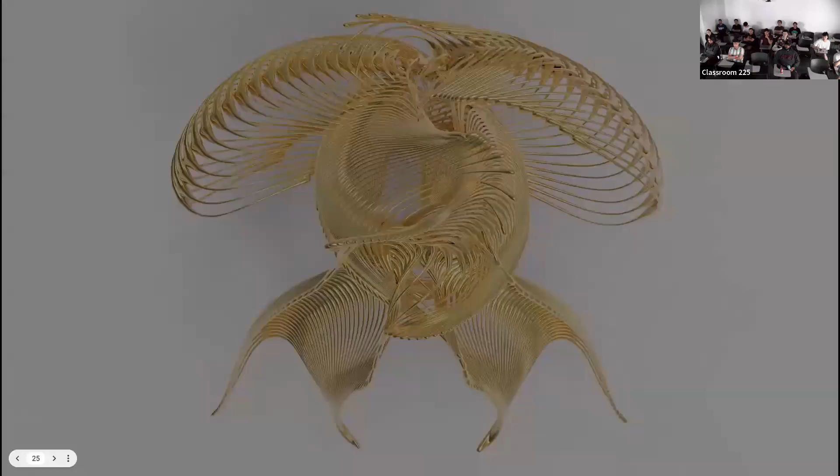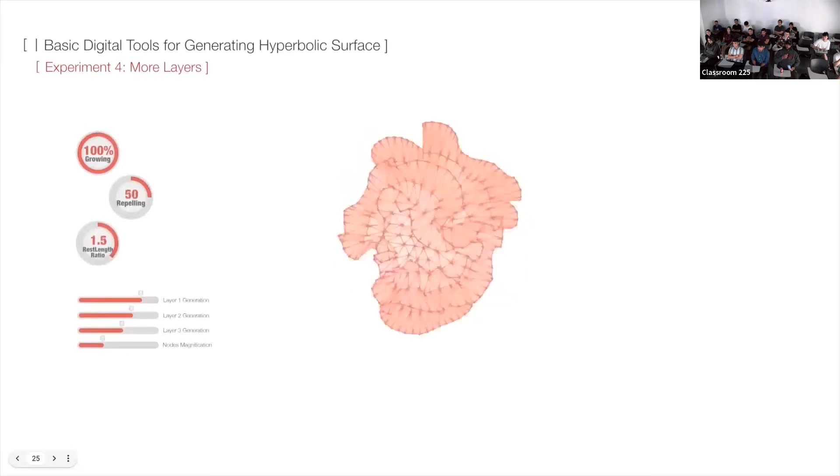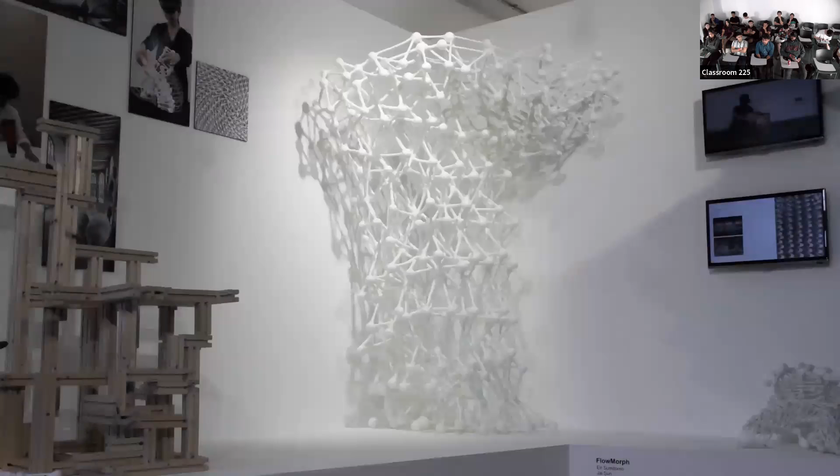Before we had the HoloLens available, most of the digital research was for robotics, modular robotics, for CNC, 3D printing. So I kind of started to look to the ways to use the possibilities of different material systems to be able to execute complex geometry in using meaningful ways.

And the way that adding is for the benefit of the digital process, in order to make the process easy, that's why it's done like that. It's not nice for plastic. Plastic doesn't do it, the plastic is not happy, it added like that. It's not necessary for that material. Of course, plastic is very flexible, that's why you handle it, but not many other materials do that.

And normally, a lot of 3D printing process or robotic printing research are really about simplifying, in order to accommodate digital information, robot only. That's why we have to dumb down so much.

But there are so many other possibilities that are unexplored. We are not interested in robotics, we are really focusing on the material itself first, and instead of having or designing or making something for the sake of using robots or using a certain process.

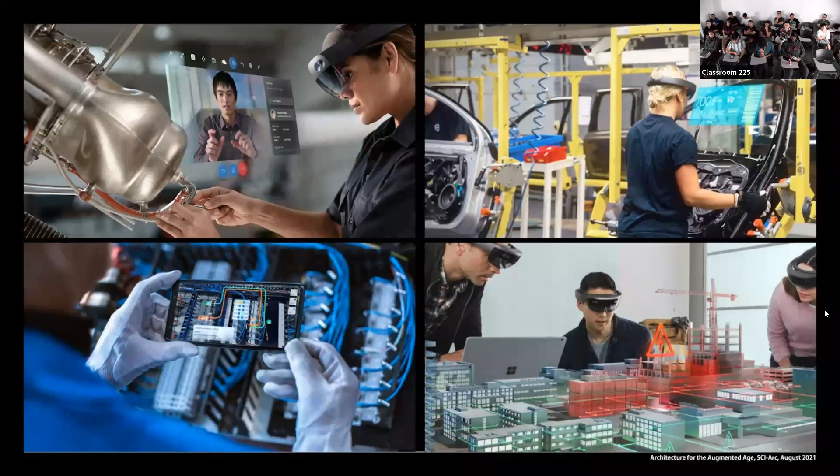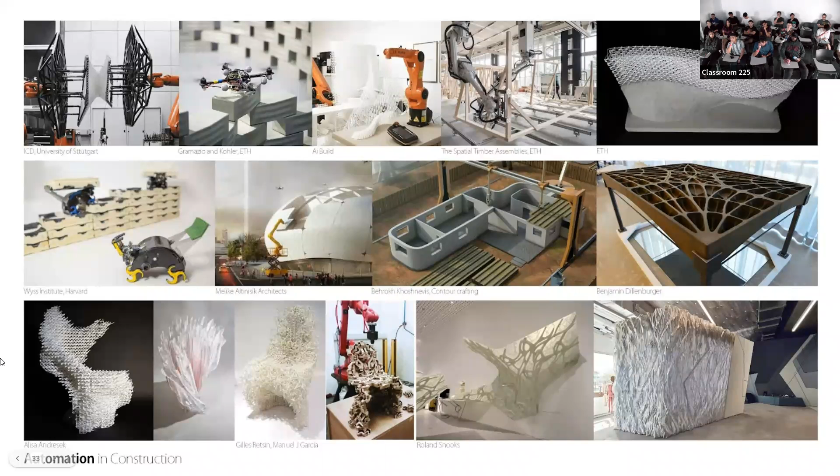So these are applications of research that has been heavily developed over the last 20-something years, really good and very much developed and focused, with a lot of money behind them, but they are based on machining processes.

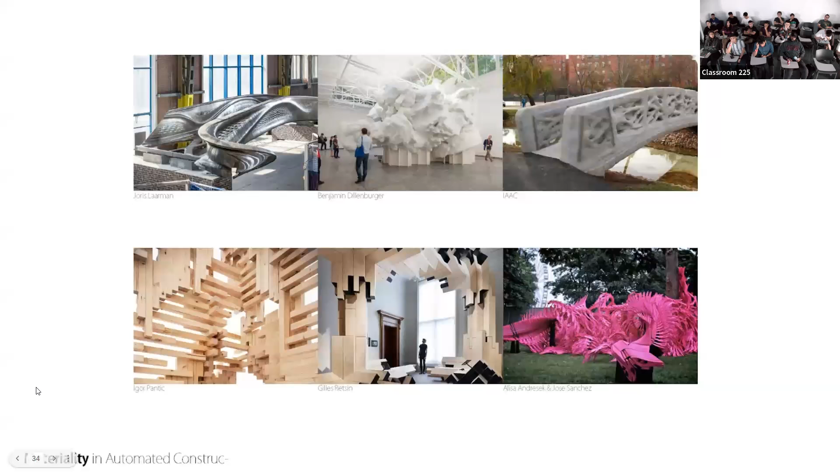They don't really accommodate typical 3D printed stuff. These are typical assembled things, and when you assemble things, you have to reduce this stuff down to a single material.

So that's what I was kind of provoking - what do you do with these kinds of processes? Is it not digital design, or not computational? No, they are - they're just not robotic. There are so many other possibilities we can explore to accommodate and bridge those computational aesthetics that are newly evolving into this world of interesting materials.

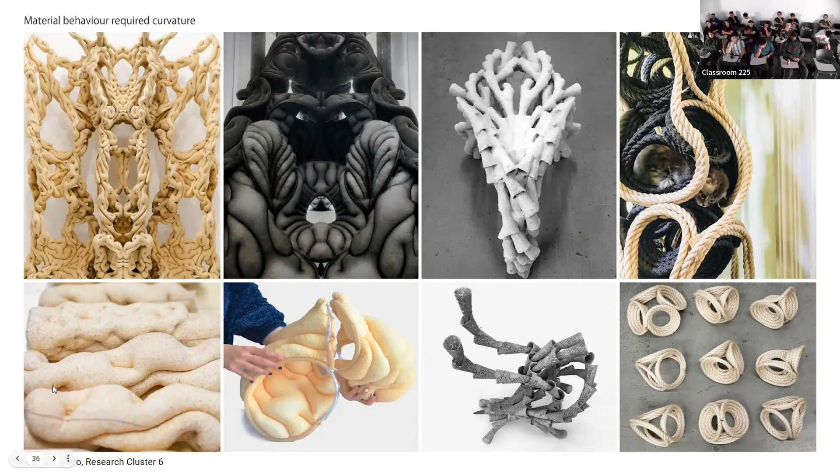So this is one of the projects our students designed. This one was done by Benjamin Meyer in 2017, which I think was the very first large building element of its kind.

Their aesthetics are kind of baroque and have similar qualities, but the last one is very exclusive and very expensive - only for a select type. That's the one we developed with the students.

They made this prototype with foam and bed by looking at the digital model. The digital model was generally used to develop this kind of prototype - using a balloon as a model, then we had to make a woven pattern.

This kind of prototype is something I showed last week - it's quite something. And then that kind of thing can go into basically some kind of coding or simulation.

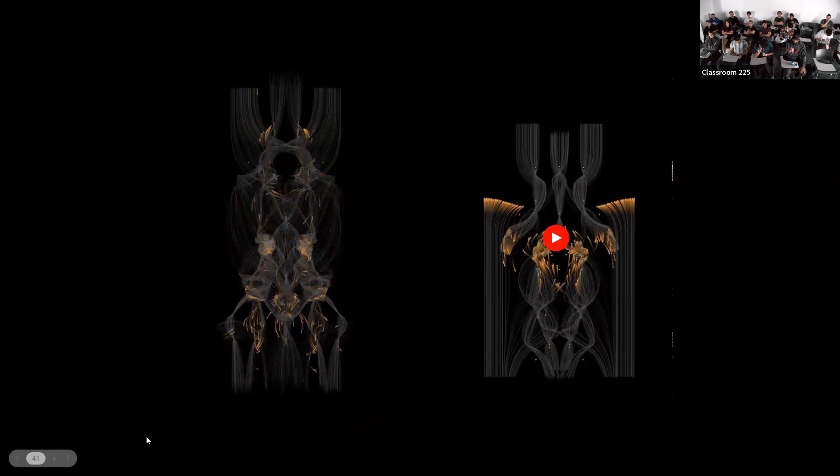Using generative methods or whatever you guys are doing, that will do a bit of designing for procedures to translate the generative pattern into manageable geometry, forward it to AR, and produce it.

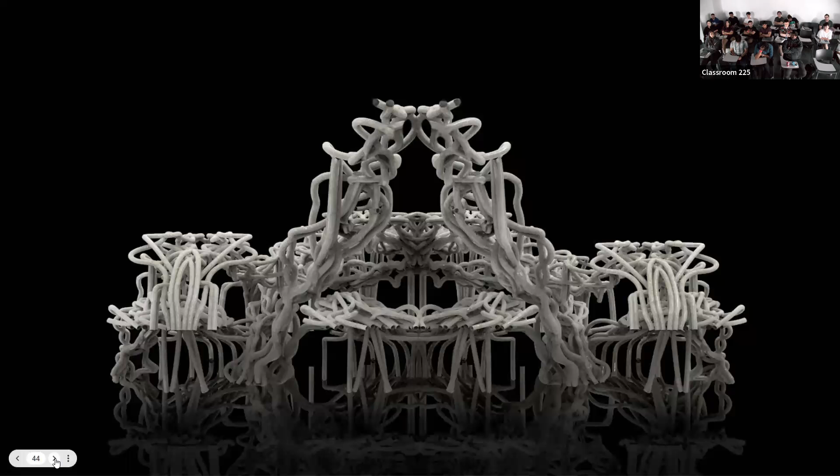If you want, you can also speculate on a larger application - a larger population of these elements into a larger building.

I normally don't show this in lectures because it's too long, but I want to show it in class - this is a 5-minute edited version of around 5 years of work on a lot of projects from what's called Research Cluster 6.

Now their lab is called Material Architecture Lab in Bartlett. I used to be part of the teaching team and helped explore the model making.

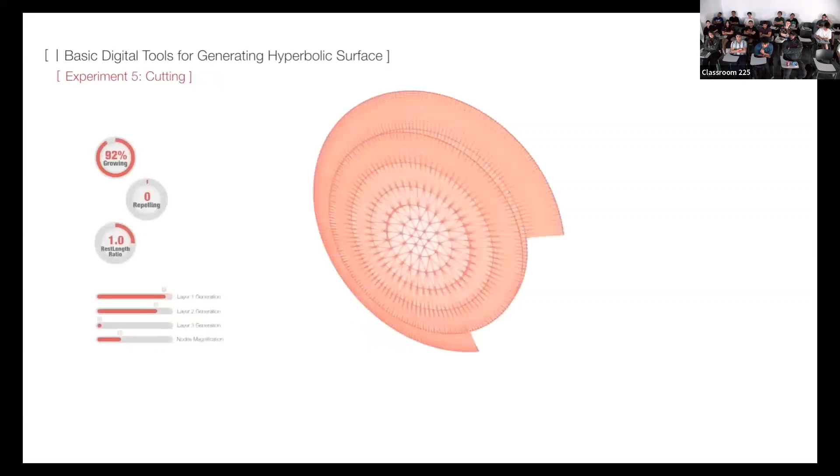So, for example, these are molded using fabrics, sewing, and flexible sponge tubes that become harder - very precise concrete. This one was kind of unique, using a feathering process - we will see it.

This one is exploring resin coating, normally used for vehicles to protect cars, or to protect ships, and we graded it. So a lot of the projects you see here show how you use soft materials to mold them into something and then harden it up, with some mixture of hard material to soft.

This one is kind of interesting - it's a previous version of the fabric project that I showed you earlier. This was using a kind of membrane stock.

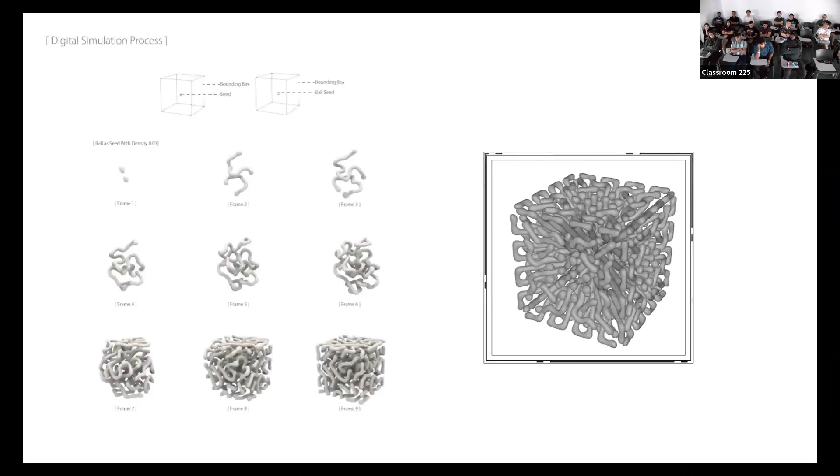What do you call it - sawdust. And then you soak it inside wood glue for a long time, and it kind of becomes synthetic MDF. You know, MDF is pressed sawdust as a panel - that's why that project was fun.

One was about carving. So this is clay, for those of you interested in exploring clay. I really love clay - you can shape it into any geometry, and when you fire it, it becomes super shiny.

This one is similar to the sawdust project, but much more lightweight. For this one, though, it probably wouldn't stand up by itself, which is why we didn't pursue it for 4 or 5.

It would be great if you guys... yeah.

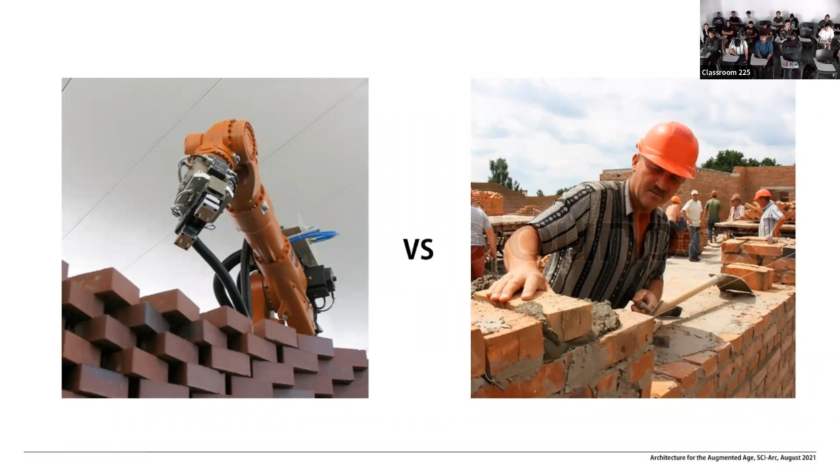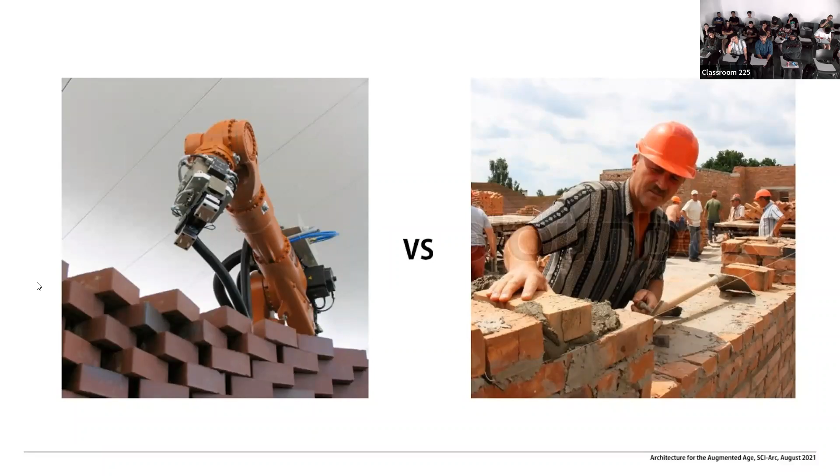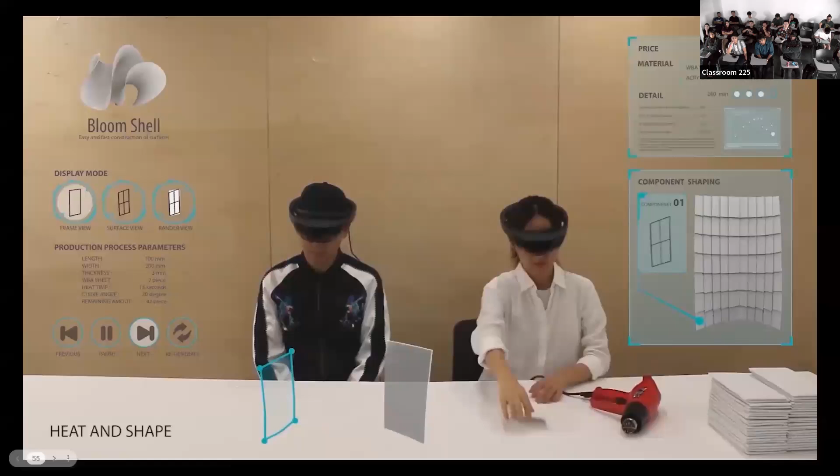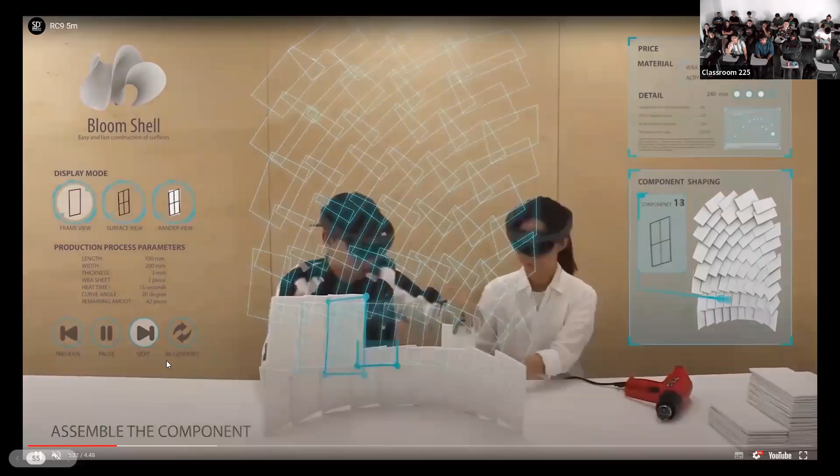Especially, after his project at Bartlett, he went to University of Liverpool, and he dove into research to integrate what...

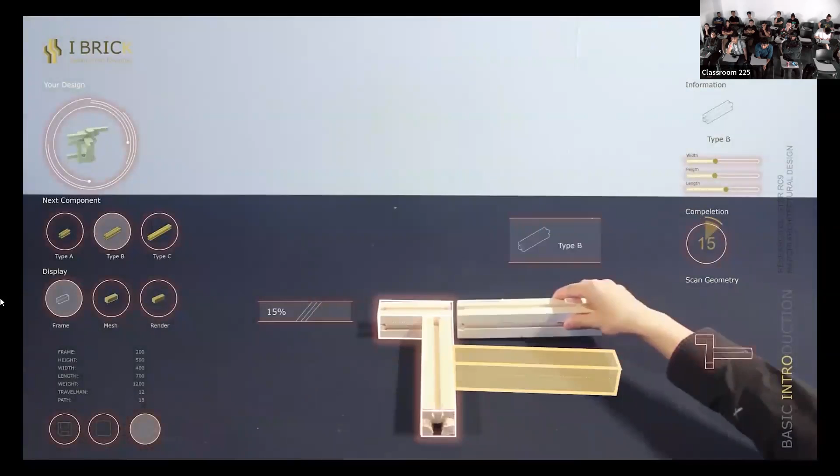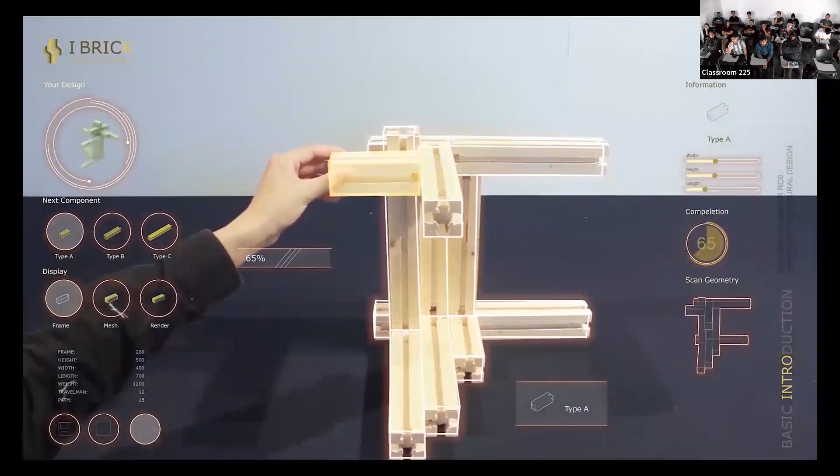So this one was calculating right now, and whatever changes you make, it changes and uses this.

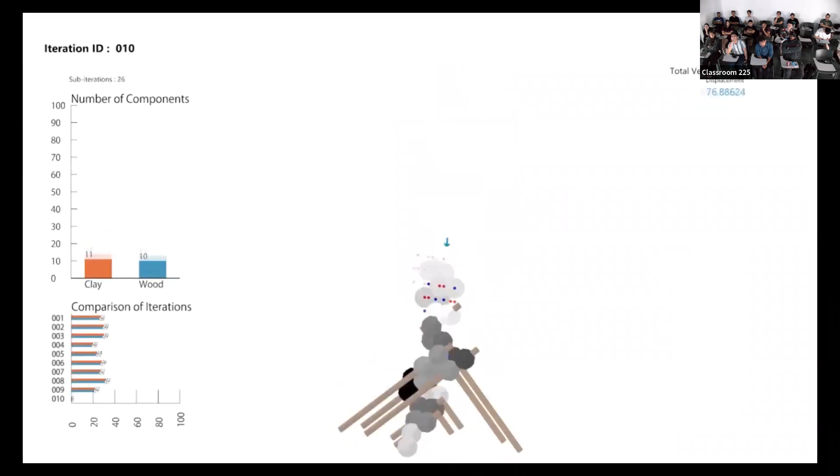And also using this, this is a big company approach. So if anybody is a big company, they make modular small components, so they can assemble different types of components using the same cluster nodes.

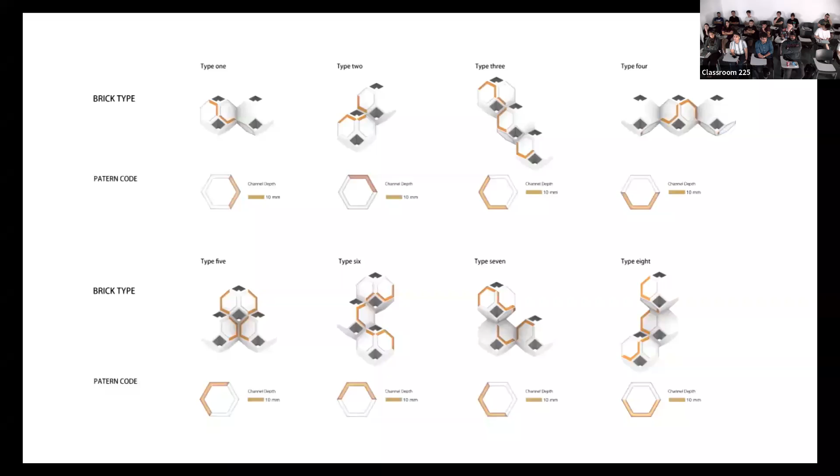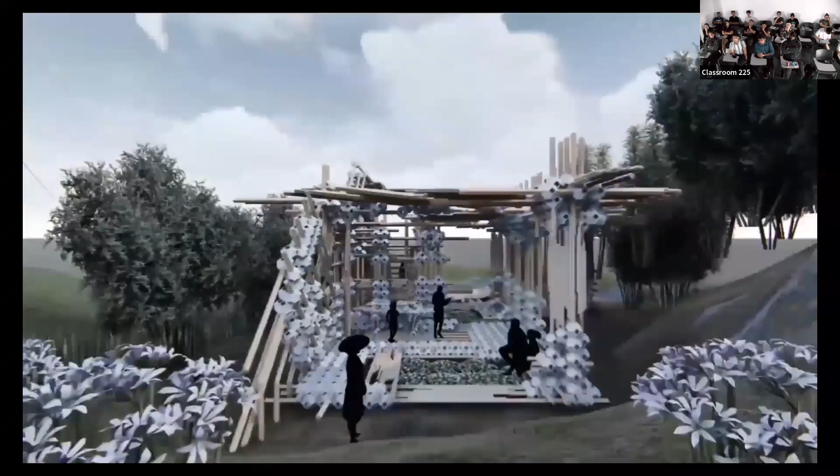Both modules also have their kind of QR code kind of thing, but integrated into their design. So like mine, they have labels, but the labels aren't like ugly QR codes or lines. All of those elements are part of the design.

There's this project using plastic. This was a provocation for plastic 3D printing. They managed to make a very stretched thermal plastic, using a thermal stretching process, creating that kind of circular intertwined module.

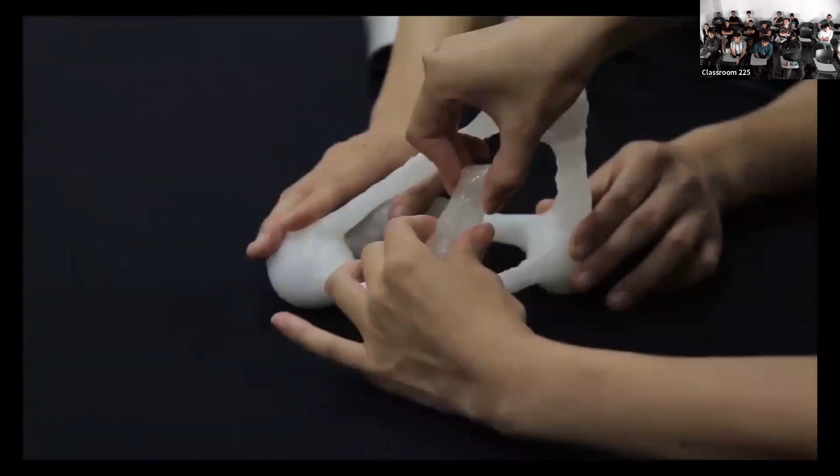They're so interconnected that they really cannot be done by robot, or it would have been very difficult to calibrate a robot to do that. But it was really strong. They made it into a huge piece.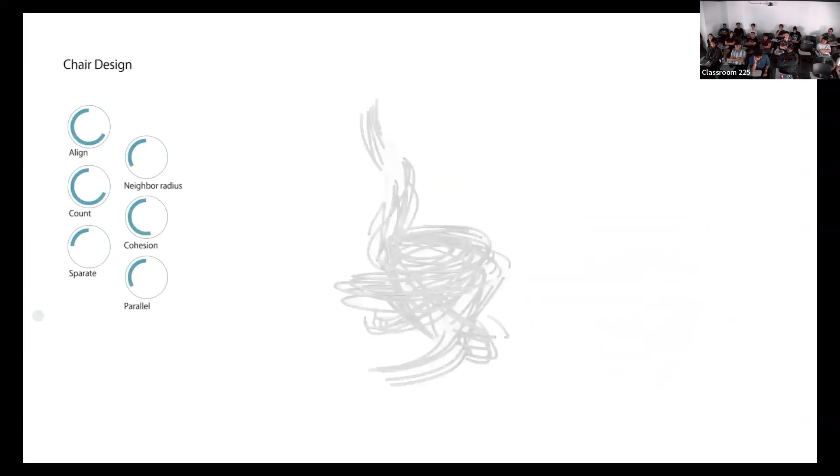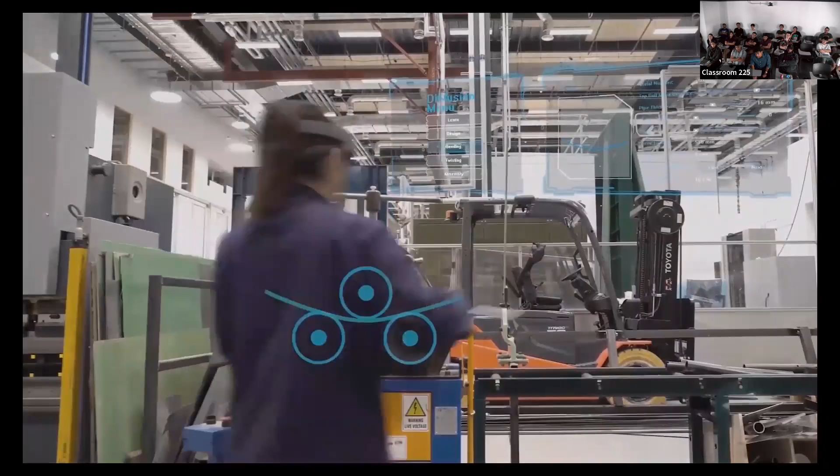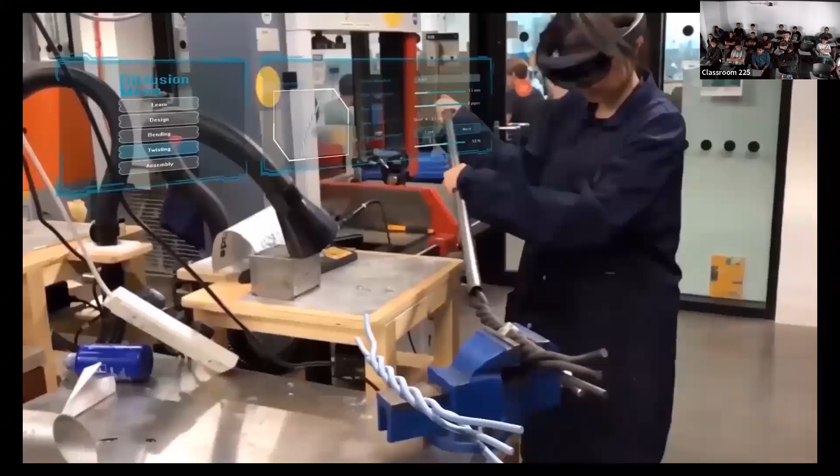This one they developed—not metal welding, but they developed this method coming from the old tradition of ironwork. When you go to Europe, they have a lot of fences made out of really nice pieces. It's inspired by that.

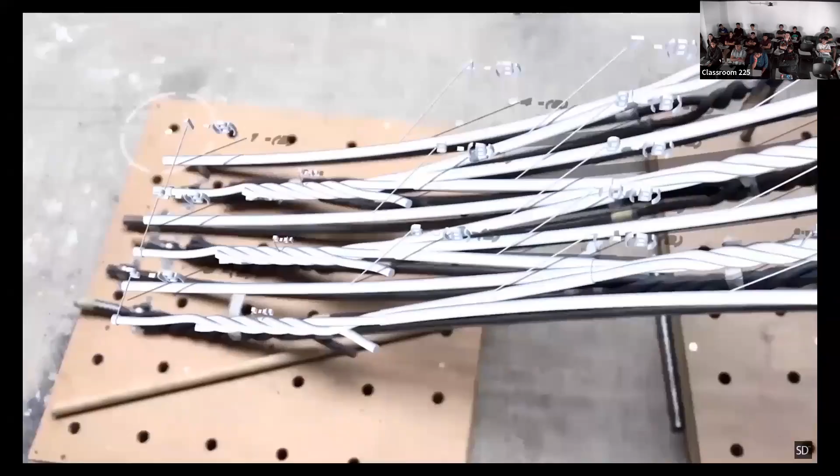And all of those could branch out to accommodate the curvature and their complexity. So this was a kind of reaction to that 3D sketch by Ursula.

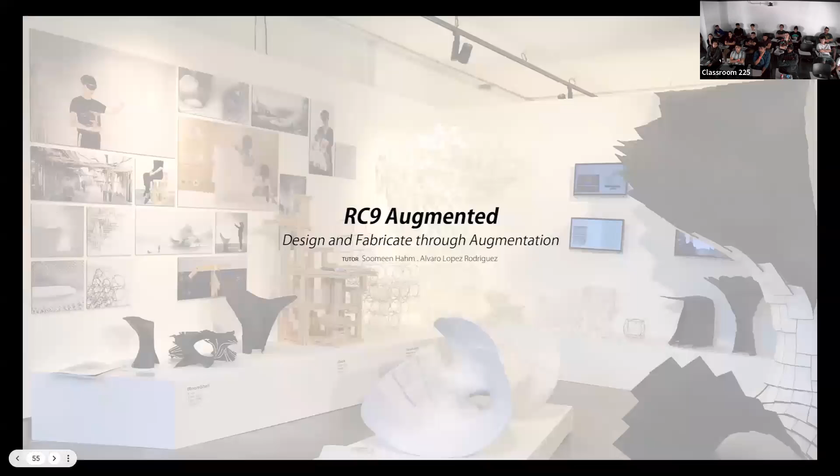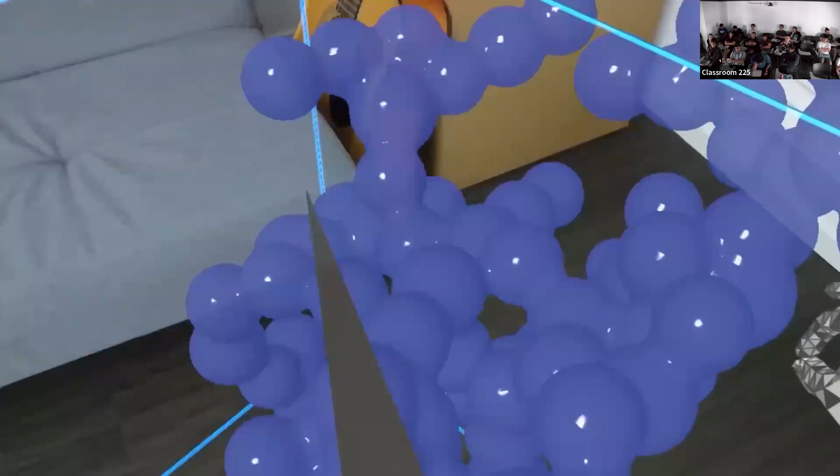They made their own work from their home. So we had to find a way, or they were really open—they are local, so everybody...

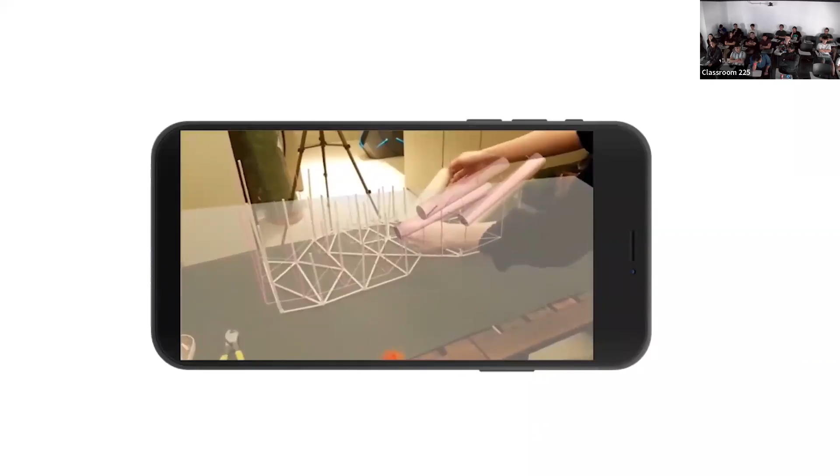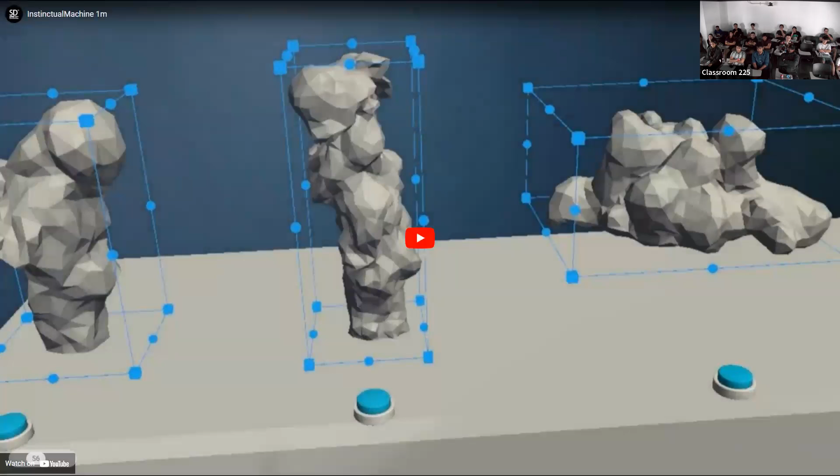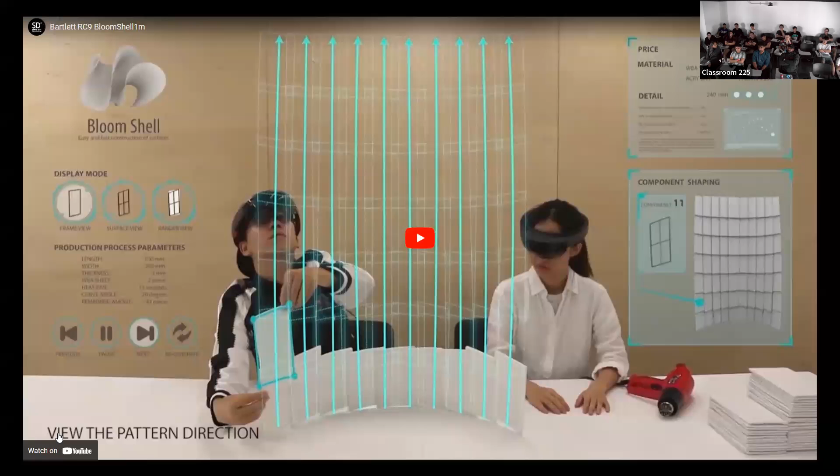Okay, so that's it. And then moving further, we are really interested in a workshop that I see the young people.

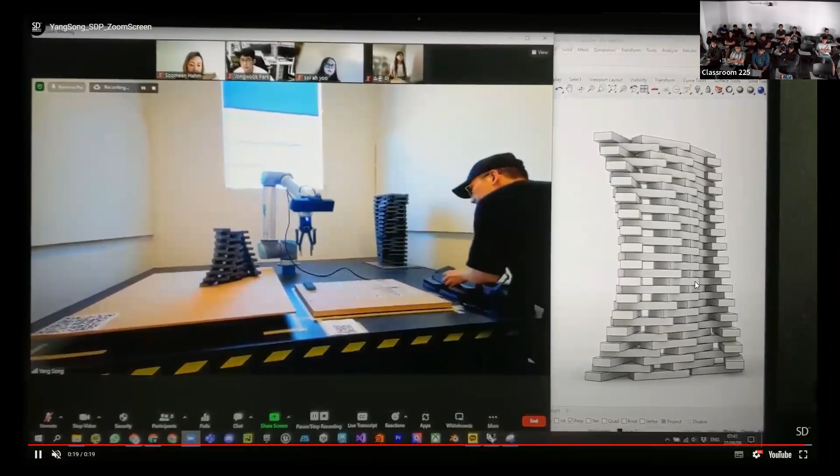So there are lots of issues and things that are unexplored yet. There are untapped communication issues with construction and integration of more human and critical robots.

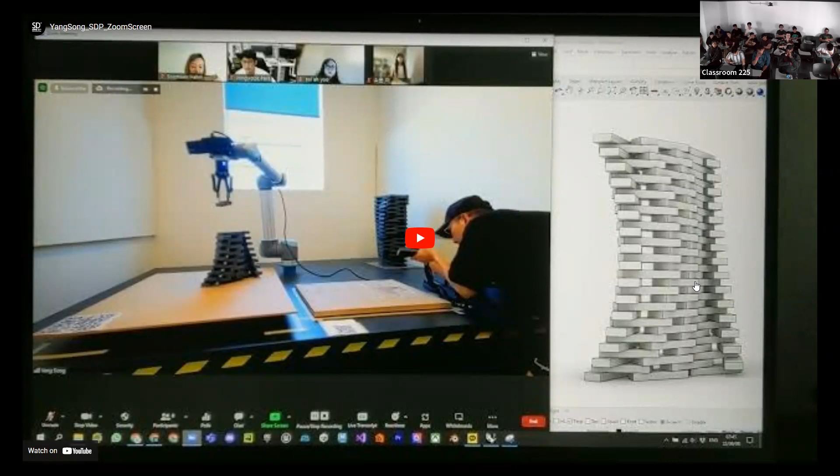All those are some issues that your generation should be aware of—at least you know what's going on, what's missing, hopefully shape your looking at that. Okay.

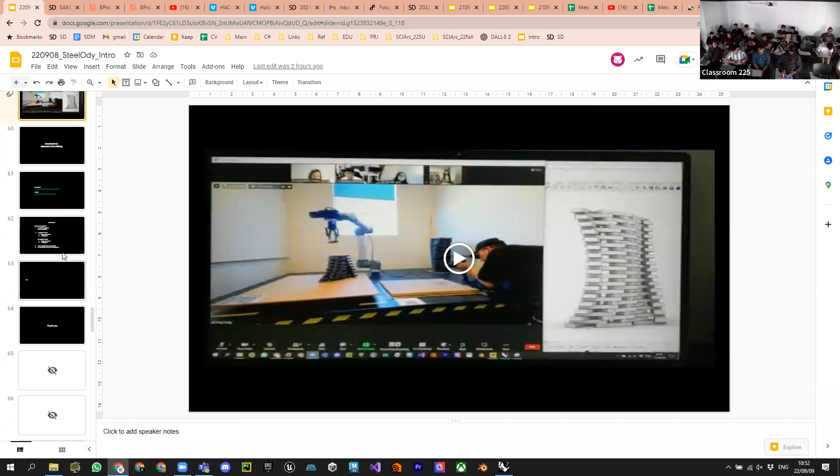I guess I'm not going to share too much about what channel, but it is just my general way. In my case, I use it more like a way to generate forms that is unaffected or not able by human.

For example, old school buildings like Frank Gehry—yeah, they were really realizing maybe sketch and vision on purpose. But what I'm interested in is the maximum use of—I have this computer, how do I maximize the use of it? And I don't, you know, most of the time we are really amazed by those settings.

But they are very inspiring—a lot of my work. So when I do—I'm not a good designer, I don't know how to sketch.

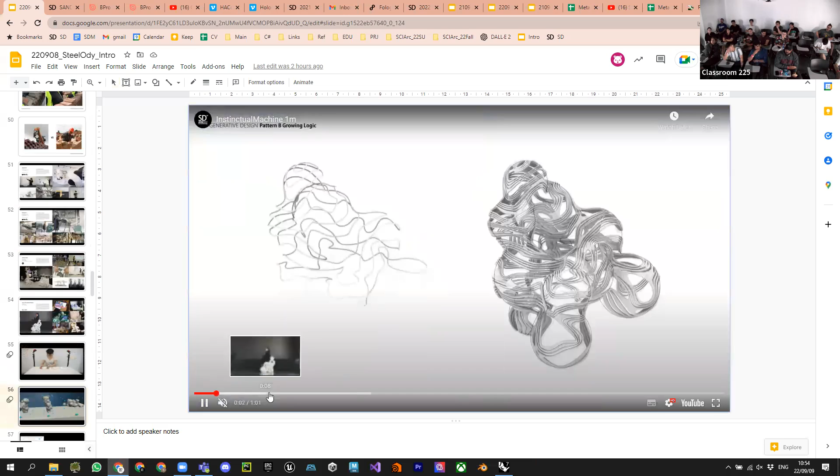So I just—oh, this one, I go—then maybe my designing methodology is what I want to share, whether you like it or not. That's why I think I got going—development.

For example, that's it, you know? Actually, we did it in the beginning. I did it and made it. So it's really open.

So if you already know whatever simulation software you use, you just do our best. So try to use that you are using—that will be more close.

Okay, so we're going to try something. I think we have—the final step has changed a little bit of the thing, so I might scroll a little bit. But we are going to use these two tools today to generate these ones. It's really cool.